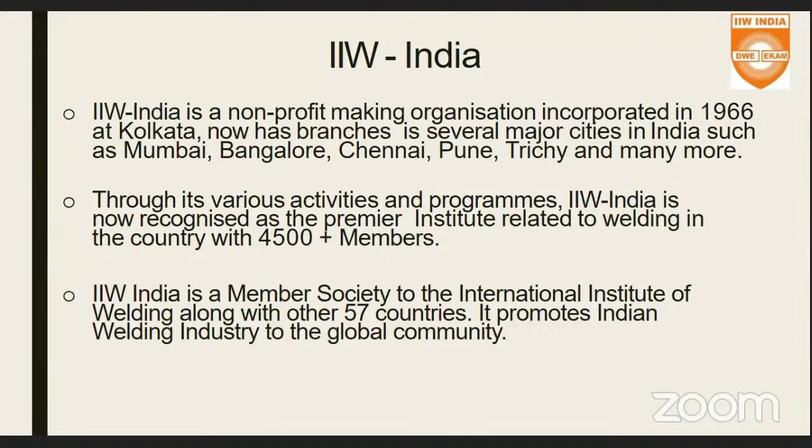Baroda, and many more. So IIW India carries out various activities and programs, and it is now recognized as one of the premier institutes in the nation, having more than 4,500 plus membership strength all across the nation. IIW India is a member society to the International Institute of Welding, along with 57 other countries. So IIW India is our face to the global welding community associated with the International Institute of Welding.

What are our major objectives? These are some of our major objectives. For example, we assist in human resource development in welding in India through activities and programs, and technology diffusion to the industry and to individuals. We also help people with research and development in welding. We focus on promoting health and safety aspects in welding and try to give knowledge to the industry about it. We also work on establishing international standards of quality for the Indian fabrication industry.

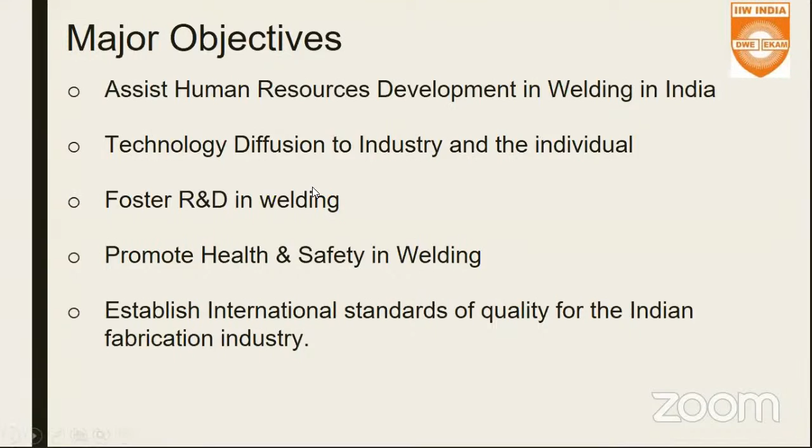Next slide. So, what are the various activities adding value to an individual and to an organization? We conduct technical meetings, workshops, and nowadays webinars. This is our World Tech Talk series, which we do every Saturday, and you all are benefiting from it. We organize various seminars, conferences, and exhibitions on welding and allied technologies at various branch levels and also at the national level, and we even participate in international events organized by the International Institute of Welding.

Besides that, we also have the Indian Welding Journal, published quarterly in collaboration with AWS, the American Welding Society, and we have a monthly newsletter also available on our website. This is the website, you can go look for yourself. So if you are a member, you can avail much more benefits.

Next slide. Some more activities related to career development of an individual in the welding industry. We help people get qualified for certifications or qualifications like International Welding Engineer, International Welding Technologist, and many more. With regards to skill development, we are connected with, for example, the Automotive Sector Skill Council and many other skill council bodies to develop welder skills, particularly in the nation. So we are heavily involved in such kinds of activities.

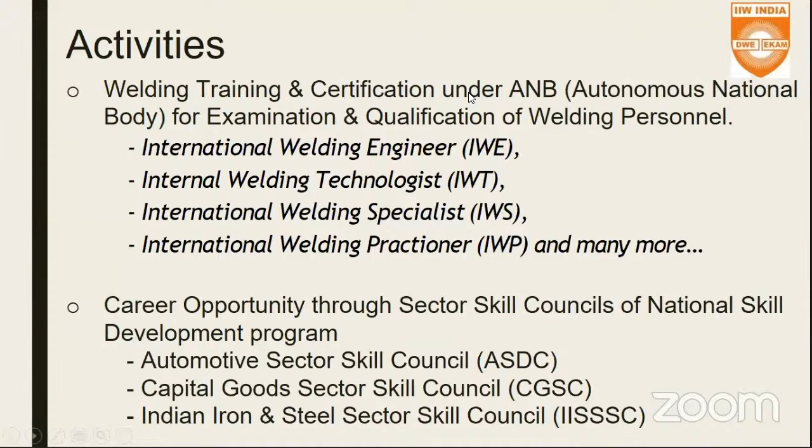Next slide. As we spoke about technology diffusion, how are we doing it? We do it by publishing journals, conducting technical programs, and skill development programs. Besides that, AM-IIW examinations are also conducted, and national level welder, best welder, and best welding engineer competitions are organized by IIW India. When I say welder competition, it covers both male and female. We carry out training courses meant for training the trainers, and we also help industry in acquiring ISO 3834 kind of certification schemes.

Next slide. Coming to the benefits of becoming an IIW member, you can take advantage of various courses and examinations that will help you in your personal career in the welding industry. You have a platform to disseminate your knowledge in welding, to add value to yourself and to others, useful networking with fellow national and international experts, free access to the quarterly published Indian Welding Journal. You can have access to those journals, and you can avail concessional charges whenever attending any welding seminar or technical event organized by IIW India.

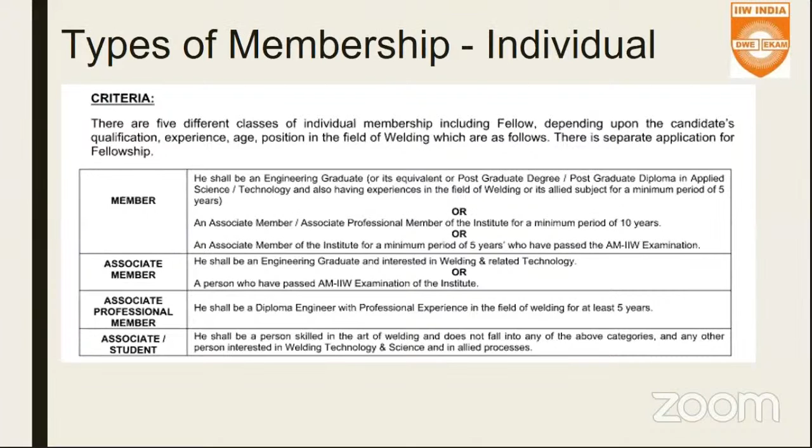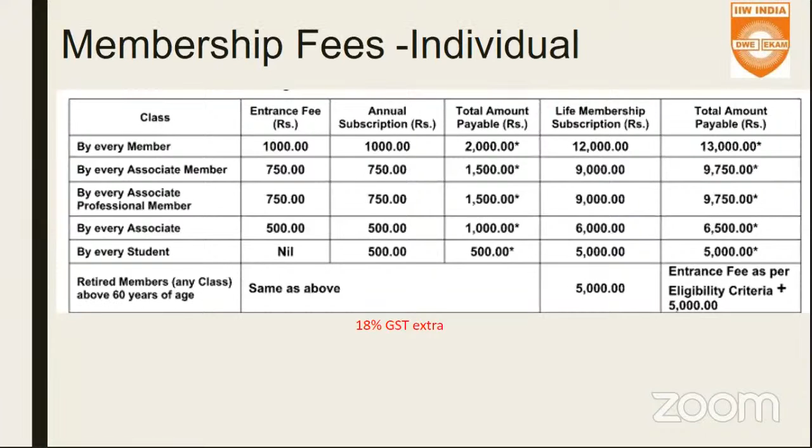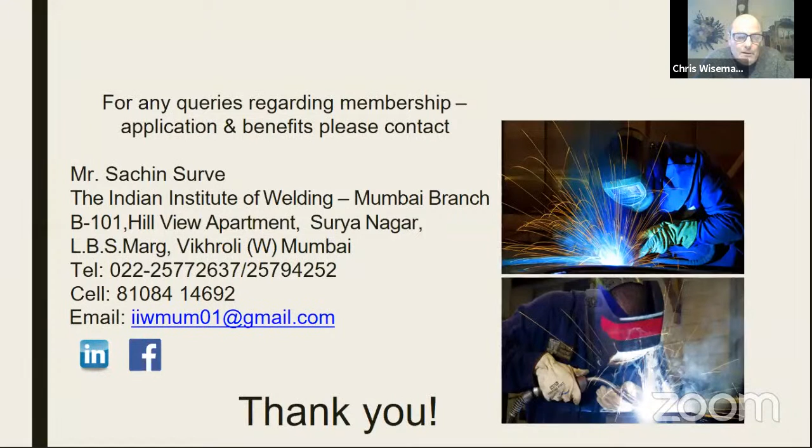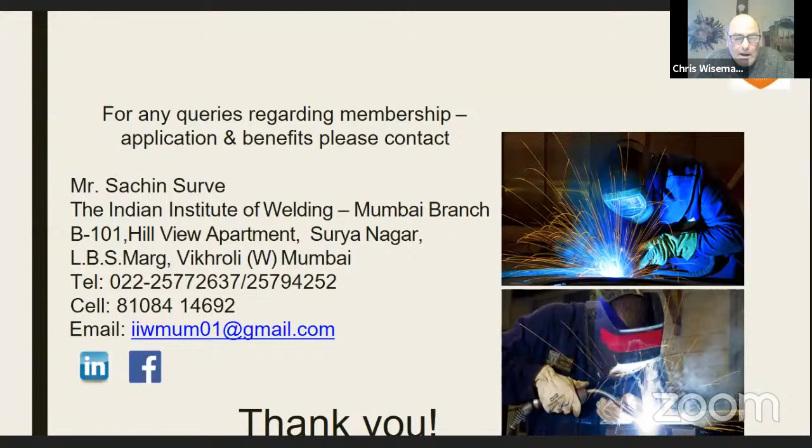One of the things I remember very vividly about 15, 20 years ago, we were trying to sell aluminium to the automotive industry. And Jaguar, who are not far from where I live, actually asked my company to show them how to put aluminium together. We entered into a whole raft of projects ranging from surface treatments to spot welding, through adhesives, that kind of thing. That's when I became aware, because I'm not a welder, how difficult this material can be. So I'm hoping today Jan will throw a bit of light on some of the practical aspects and the characteristics of aluminium that make it a very special, difficult, but well worth material.

Particularly going forward as we're looking to lightweight in many different industries. So Jan and I have quite a lot in common, not least, I think he's almost as old as I am. We both live in the West Midlands, which means we both can just about understand Birmingham accents. But there the similarity ends, and I think you can see that straight away, it's around our heads. I do remember when I last saw Jan in person, he actually recognized me in a crowded room and called out my name from behind, and he purely recognized me from my lack of hair. So it's quite an interesting feature.

Jan is actually the technical manager for something called the Aluminium Federation. This is an organization which TWI is very proud to collaborate with from time to time, particularly technically, but also commercially and sector-wise. It's known as ALFED for short, and it's actually headquartered not far from where I live in a place called Halesowen, which is in the Midlands of the UK. ALFED basically represents and creates opportunities for companies and individuals who may work with, process, or trade in aluminium. ALFED is very UK-centric, but it also has a global reach and remit.

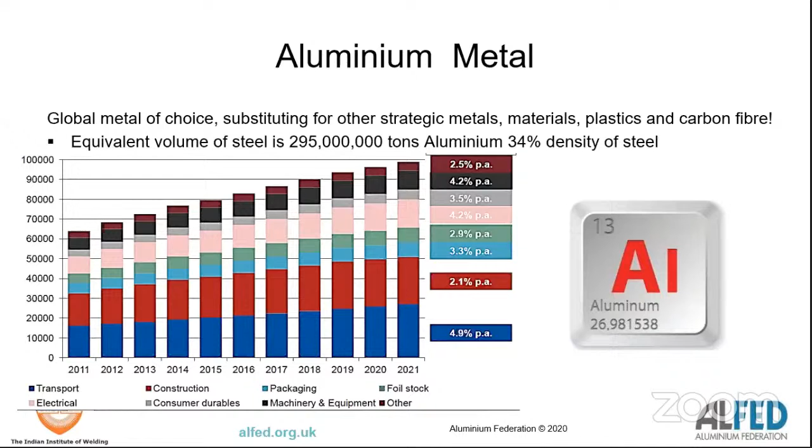Aluminium is a light metal, so we should never talk in weight of aluminium, we should talk in volume. So in 2021, we're going to have a third of a billion tons of equivalent aluminium to steel. Steel production is about 1 billion tons. If you talk in terms of the equivalent volume of aluminium, it'll grow to about a third of a billion tons. The predictions are that by 2030, we will be approaching 500 million equivalent tons.

So let's pick out the problems of welding aluminium. The very first problem you're going to encounter - yes, we can match the strength, but it's got a very low Young's modulus. It's very elastic, very low melting point. When you heat it up, it rapidly loses tensile and yield strength, which is actually a big benefit. The thing that frightens everyone is its ability to form a tenacious oxide, which is actually a benefit in many things. It's got high electrical conductivity, high thermal conductivity, low resistivity, and high thermal expansion. From the welding point of view, fearful properties, but they are absolutely easily understood and easily controlled.

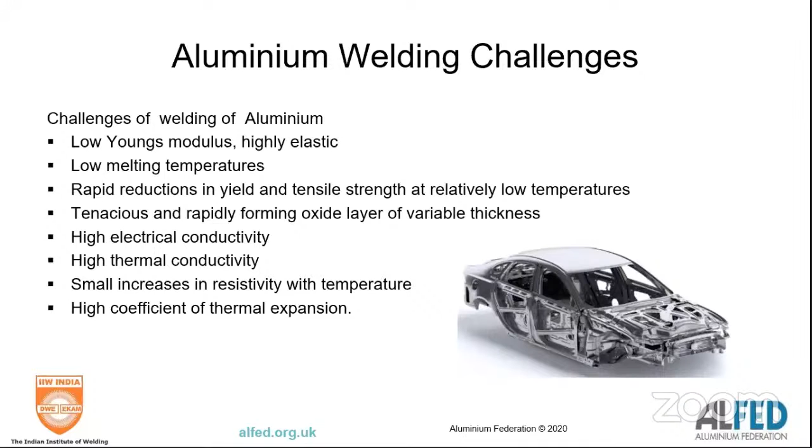Because aluminium is a young metal, it's been developed by metallurgists, and incrementally, the series have been developed. Very briefly, the 1000 series are pure aluminium. The 2000 series are based on copper, an age-hardenable aluminium. 3000 is an improved manganese version for high resistance. 4000 is actually specifically designed originally as a filler for welding. 5000 dominates automotive, non-heat treatable. Then we come into the high tensile 6000 and 7000 series, which dominate aerospace.

In terms of weldability, the 1000 and 4000 series have incredible weldability, as good as any steel once you understand them. The 3000 and 5000 series have got very good weldability. The 6000 has good weldability once you understand how to weld it. And then you run into the problems of the 2000 and 7000 series of aluminiums - these have got very limited or very poor weldability. We'll pick those out. And then there's a mishmash series of 8000, which is looking at medical, nuclear, bearings, everything else, very variable welding in that area. So let me pick out the first property.

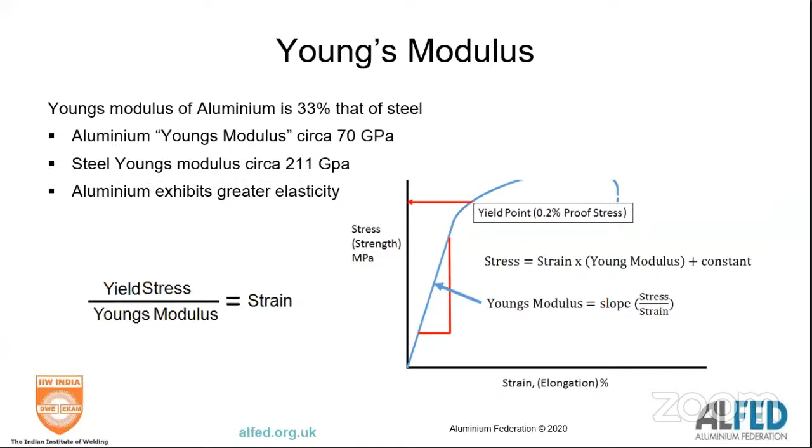Aluminium's actually got a low Young's modulus, about 1/3 that of steel. So although we can match the yield strength and tensile strength of a lot of alloys, it is far more elastic. And that elasticity means that when you're doing things like forge welds, you've got to do a lot more effort. In a typical forge weld where you want to upset, you would need to put in about 3 times more upset deformation to achieve a forge weld in aluminium because of its low Young's modulus, because of its high elasticity. It's very, very springy.

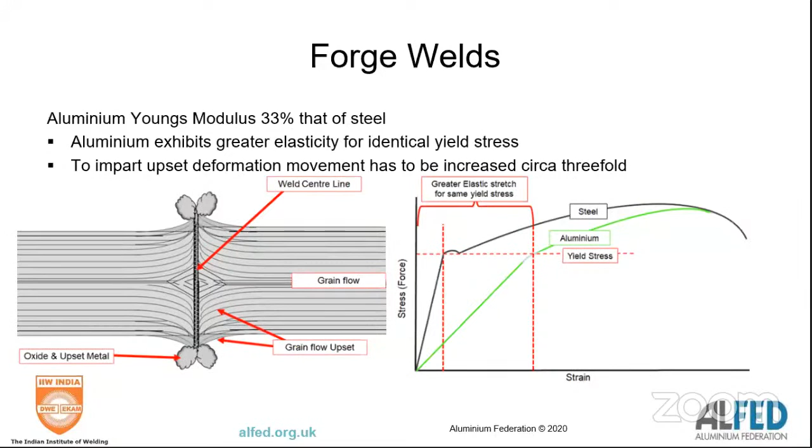That springiness is great when you're designing suspension components or crash cans or things like that, but it's a problem. So when forge welding it, when you're upsetting it, in essence you've got to do 3 times more plastic deformation to achieve over steel. If you don't, particularly in a forge weld, you end up with a wide weld center line, which is effectively a fusion rather than a forge weld with poor strength. So that's the very first, easily overcome problem of aluminium - low Young's modulus.

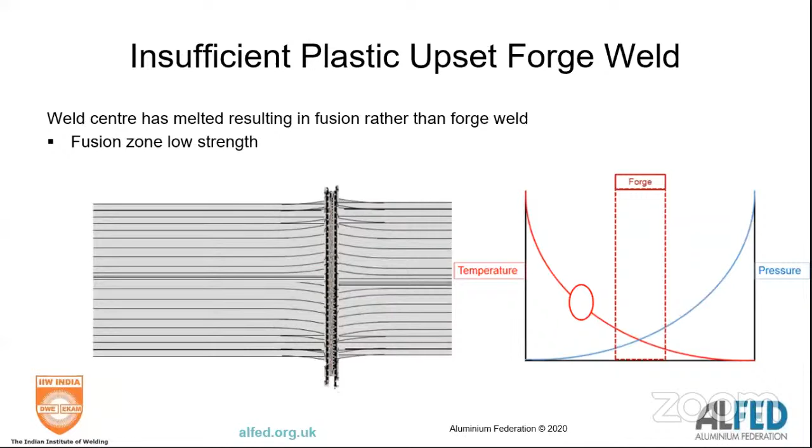Pick out an important property - aluminium's got low melting points. Pure aluminium melts at 660 degrees C. If you look at the higher aluminium alloys, they have low melting points down to about eutectic temperatures, down to 450, 470 degrees C. So it's a very low melting point metal. At 450, 500, you're below red heat. So very low melting temperatures. That has implications in that we don't form scales, we don't need complex tooling, we've not got thermal losses, we've not got radiation losses. So it's a plus and a minus.

One thing you need to understand when talking about aluminium is exactly what we mean. When we warm aluminium from room temperature, we have to put a lot of heat in - effectively, that's specific heat, the energy required to raise the temperature of a metal. In essence, specific heat is the heat to raise unit mass by 1 degree Kelvin. What I'd like you to understand is that specific heat has units of joules per kilogram kelvin, and a joule is a watt second. So whenever we talk energy, we are actually talking about a time element. People think of energy purely as temperature, but you must understand that energy has a time element, and that is the secret to welding aluminium.

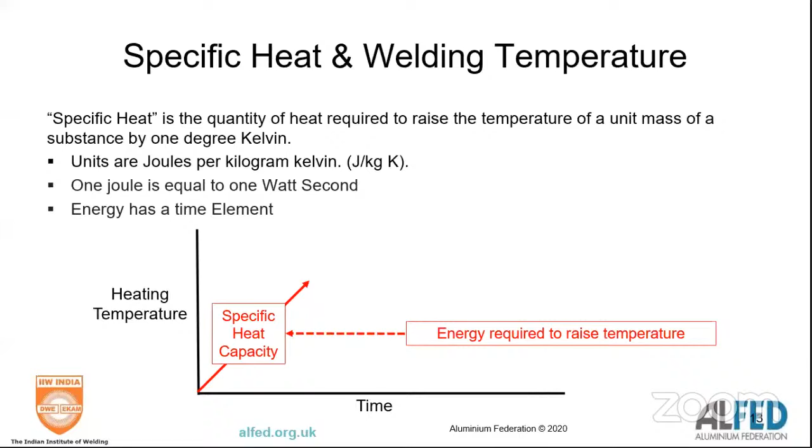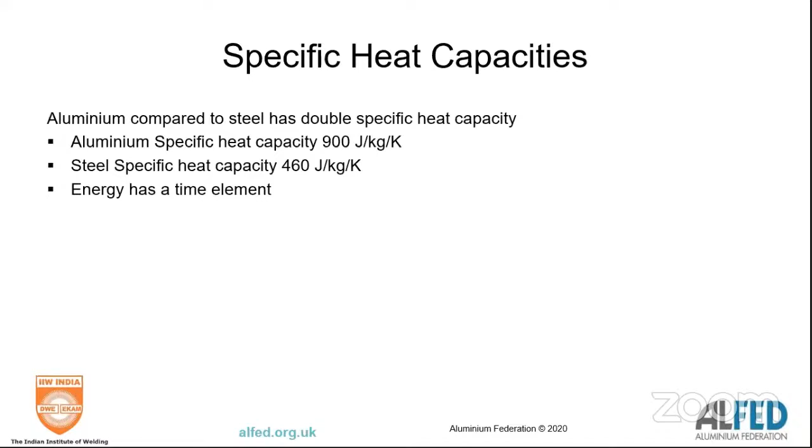So aluminium has double the specific heat capacity of steel, and that has a time element. In essence, what that means is when you put energy into aluminium to heat it up, nothing happens for a period of time, because what you're doing is raising its specific heat, and then it sails away. So with aluminium, what we have is a time element, because energy has a time element in it.

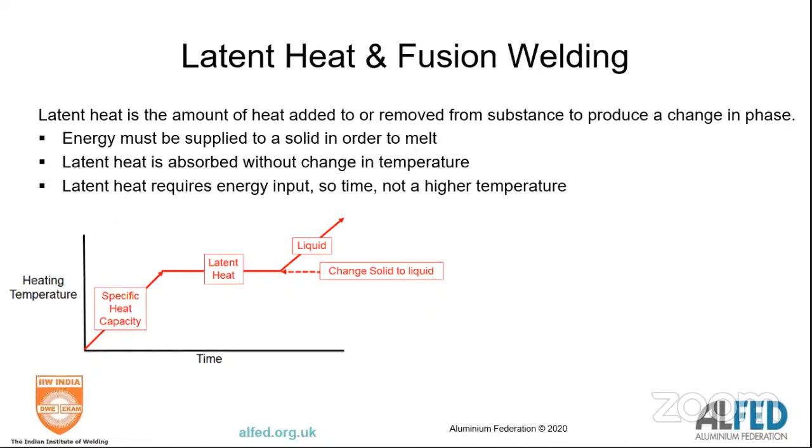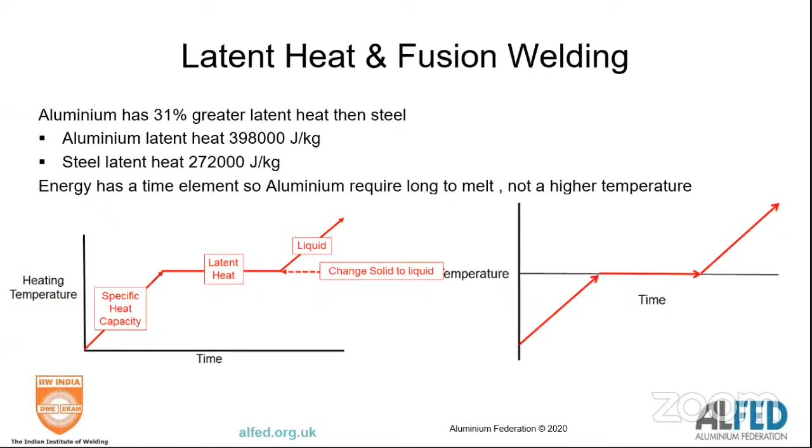When you talk fusion, so we've raised the temperature of the solid - when you come to fusion, you've got latent heat. Latent heat changes solid to liquid, and aluminium again has a third higher latent heat. So again, what you need to do is put more energy in, but in terms of time - you pause to put the energy in rather than turning up the temperature. So many people, when they're welding aluminium, think nothing's happening, and the normal thing is to turn the welding temperatures up, and then you just end up with a melt, a disaster.

The other thing that happens is that aluminium has very, very high thermal conductivity - about 200% the thermal conductivity of steel. That means you've got a high rate of heat extraction from weld zones. Bearing in mind that when you're heating aluminium up, you've got a time element, so you're heating time up, but conduction has a time element too, so you're actually taking a lot of heat out as you're putting heat in. So always with aluminium, what you see is a time delay.

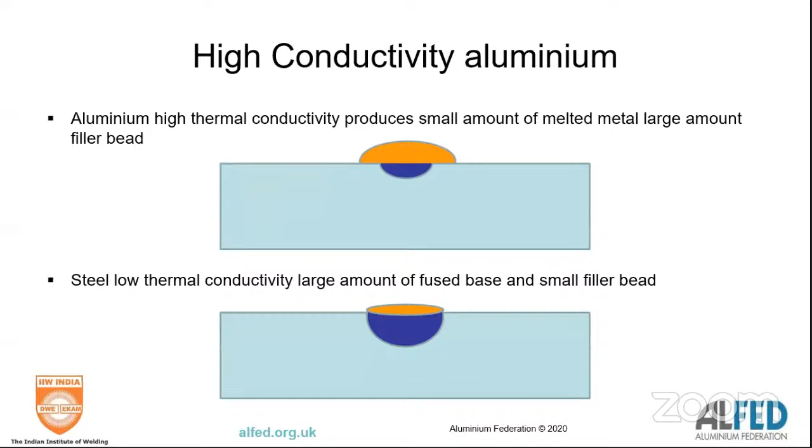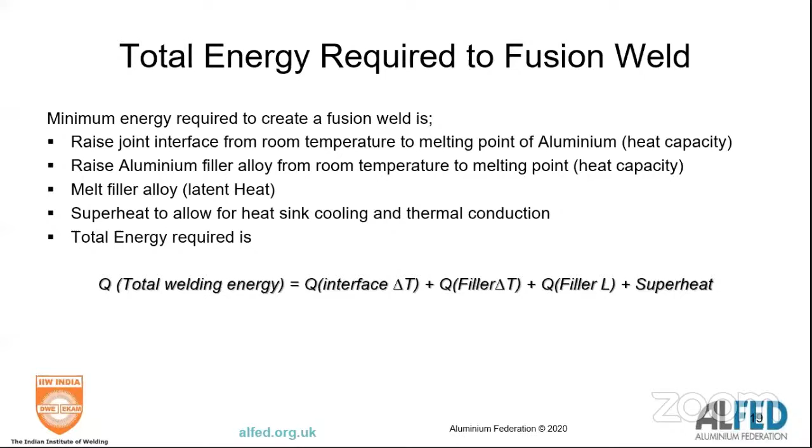The high thermal conductivity and the high specific heat in essence means that when you're doing welding, you produce a very large filler bead and a small amount of parent metal, in opposition to steel, where you produce a small weld bead and a big fused base. So aluminium behaves oppositely to steel. In essence, when we talk about energy, the problems we have with aluminium, which are not really apparent with steel - yes, we've got specific heat, yes, we've got latent heat, but you've got latent heat of the filler and of the parent metal, plus significant conduction away. So you need to consider superheat when talking about the total energy for welding aluminium - that superheat element to overcome conduction.

Pause a minute and let's look at electricity.

Aluminium's actually quite a good electrical conductor. Its resistivity is about a third that of steel, roughly 1.5 times that of copper. So it's a poorer conductor than copper, but a really good conductor compared to steel. In terms of welding, we consider it to be a very good electrical conductor.

We need to drop another thing in. We should talk about alumina in a moment, but aluminium forms an oxide that is an electrical insulator with very, very high resistivity.

So picking up on what we've spoken about so far, in essence, aluminium has a low melting point, typically about 40% that of steel. Welding temperatures are much, much lower than steel, never more than about 60% of that of steel. If you allow for the specific heat and latent heat, typically you've got to put 300% more energy in than you would for steel. Remembering that energy has a time element, because of that, your process times are about 30% greater than that of steel. So more energy, greater times, but very weldable.

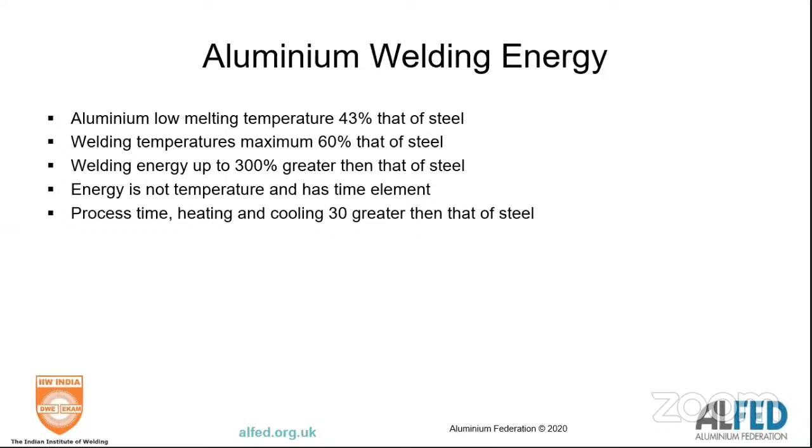One thing you need to do when welding aluminium is go and buy yourself a cheap imaging camera. We are invariably welding below red heat, so you cannot see what's going on. A very cheap imaging camera will show you what's going on, and it will also indicate temperatures. It's very, very useful to get yourself one of those. It's part of the secret to good welding.

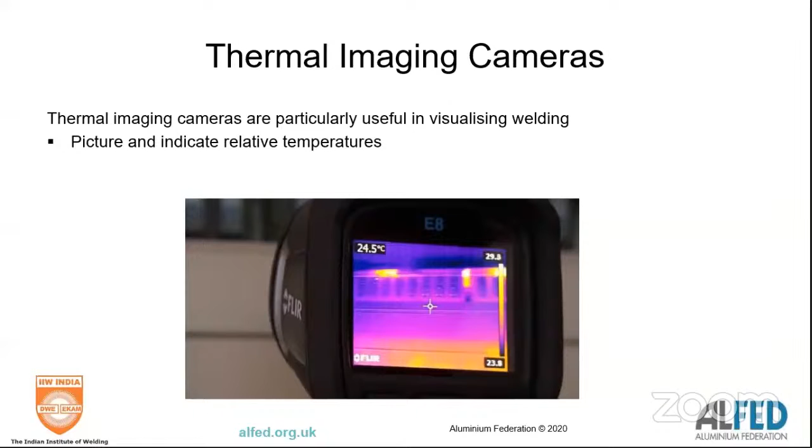Let's look at another property. When you melt aluminium, it has high fluidity, and particularly the 4000 series, which are based on silicon, have incredible fluidity. If you talk about the high silicon aluminiums, you can have fluidity which matches that of water, an incredible property for castings. You need to understand that when you're welding, because you're going to end up with fluidity like that of water.

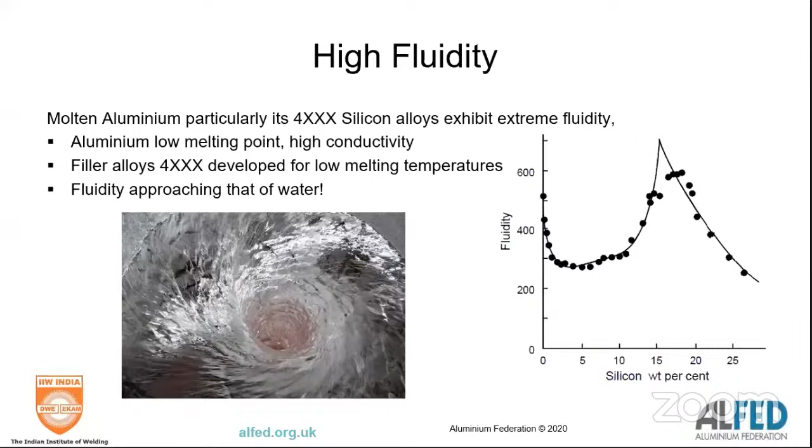The 4000 series of aluminium are based on silicon, so silicon is the principal alloying element. The reason they were developed is that parent metal alloys have high thermal conductivity and low melting point, so if you try and weld them, you just end up with a pool of liquid. By developing the 4000 series, with low melting points down to the low 500s and some down to the high 400s, you can now melt your filler metal with good fluidity without melting your parent metal. So it's an important property.

Let's talk about aluminium oxide. Aluminium oxide is incredible because it imparts the corrosion resistance that sets aluminium aside from so many other metals. But it's alumina, aluminium oxide, so it's a ceramic, meaning it's an electrical insulator. At 15 microns, the breakdown voltage is about 500 to 600 volts. It has a very high melting point, about 2000 degrees C, and very high hardness, typically about 900 Vickers. It's also very brittle. One thing you need to realize is that alumina is much heavier than aluminium.

So if you've got alumina forming in a weld pool, it will sink to the bottom as an inclusion.

Now, aluminium really develops an oxide instantaneously. If you scratch aluminium, by the time you've walked away, that scratch will start to self-heal. Typically, if you've got a chemically active surface of aluminium, within about 20 days it will have developed 10 to 15 microns of aluminium oxide. And that aluminium oxide carries on growing. It's one of the plateau curves, but aluminium will always form an oxide. It is self-healing and it will grow with time.

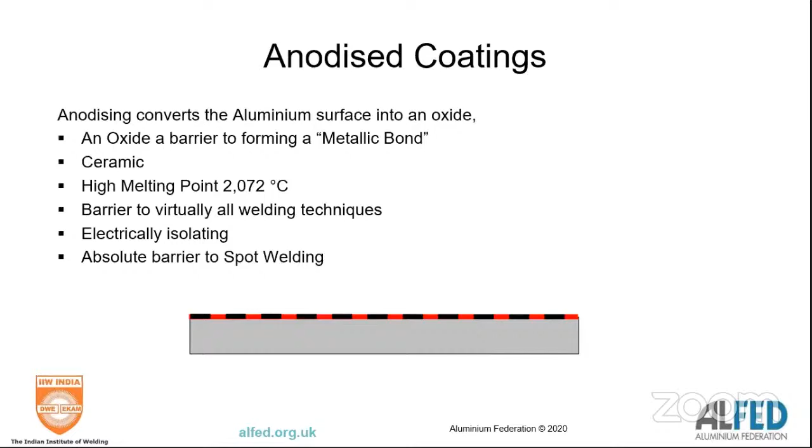You're going to come across anodized coatings. In essence, with anodized coatings we electrically and deliberately oxidize the surface of aluminium to produce an alumina coating on it. If you've got an anodized coating, you will never, ever be able to weld it. It's an absolute total barrier. So, alumina is a thermal and electrical insulator, a total barrier.

When you weld, you go back to very basic theory. What you do is produce a metal-to-metal atomic bond, but you've got a ceramic oxide in the way, so you need to remove it. You need to either push it out, exude it, or melt it out.

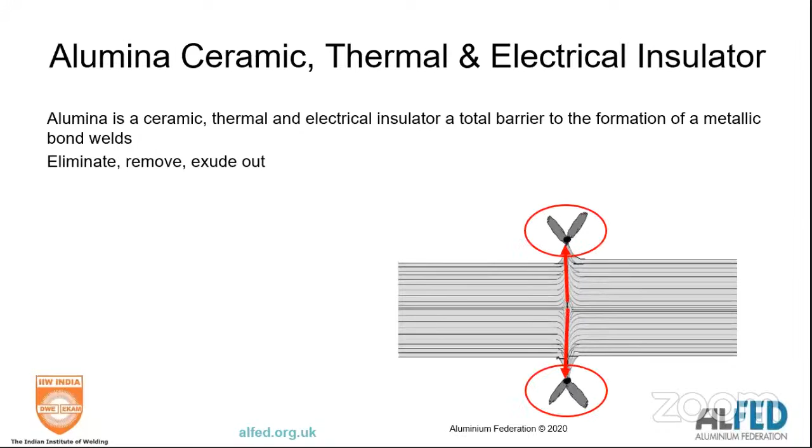If you're going to do very simple welding, very quick, you can physically remove the aluminium oxide, abrade it away, grind it, machine it. But remember, you've got a short time interval. If you grind aluminium, depending on humidity and temperature, you've got 2 to 3 hours before that oxide starts to form. You can atomically remove it.

You can use electricity, electron flow, by adding a couple of electrons to reduce the oxide and lift it off. You can chemically remove it and passivate the surface. You can upset the alumina out as part of the welding process, a forge weld, and you can melt and shield it with laser welding, using very high temperature methods. You can melt that alumina and remove it. Remember that it's heavier than aluminium, so it'll sink if you're not careful. And you can disperse alumina through processes like ultrasonics.

So I'm going to pick up on the last one. There's a lot of work going on in the automotive industry in the UK and particularly in the USA, and Ford are now starting to ultrasonically weld aluminium. In essence, ultrasonic welding is a micro explosive weld. What happens is the welding tip is vibrating at ultrasonic frequencies.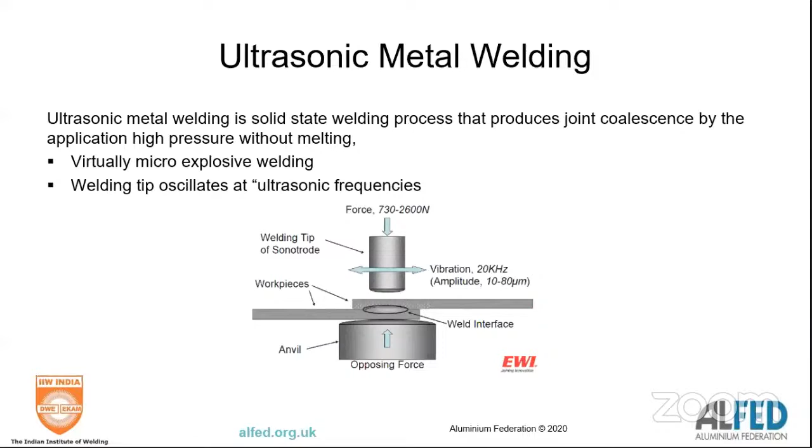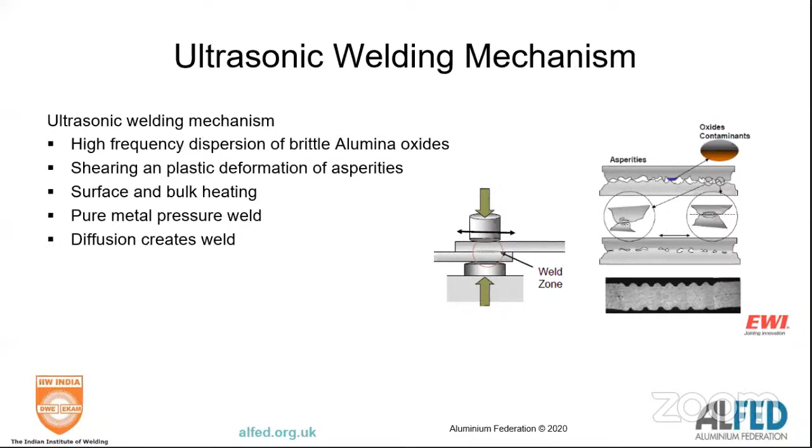Because it's welding at ultrasonic frequencies and alumina is brittle, ultrasonic frequencies actually shatter and disperse the alumina. Then pure aluminium to aluminium is a shearing process, so you form surface and bulk heating, and it becomes a pressure weld. So ultrasonic welding deals with alumina - in essence, it's a micro explosive weld. Lots of work is going on, and Ford has now started to commercialize the process. If you're talking microelectronics and small components, ultrasonics is catching on in the UK as an alternative to soldering.

Just to pick out a property of aluminium: it is non-sparking. When a metal sparks, what happens in essence is the pure metal is burning in oxygen to produce an oxide. Because aluminium will instantly oxidize, you very rarely see sparking of aluminium, because it forms an oxide instantaneously.

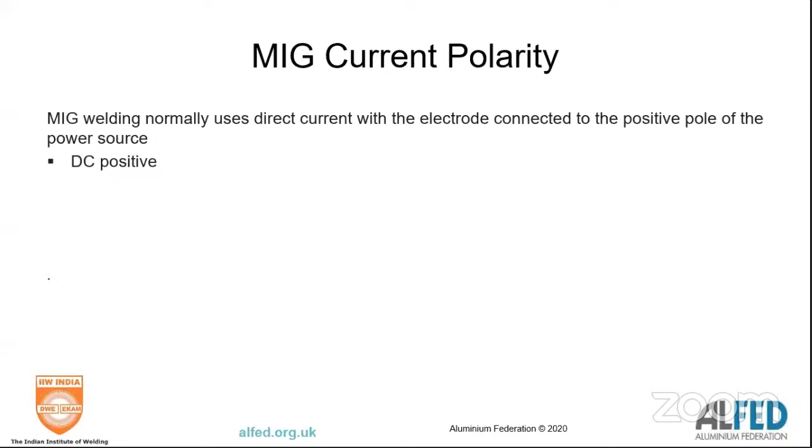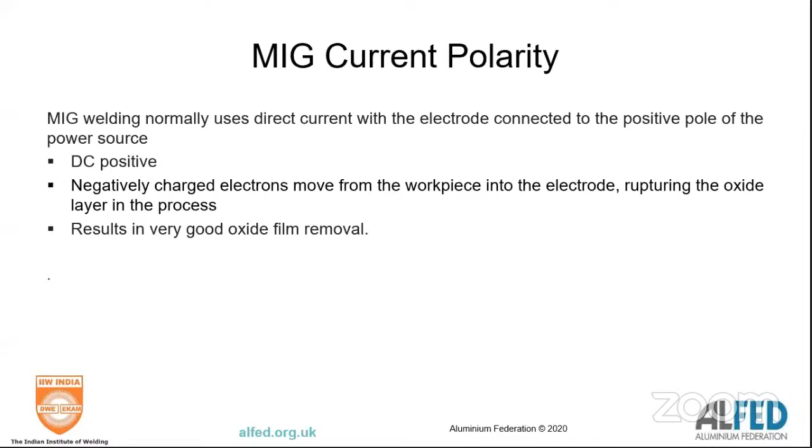So let's talk about a big process of welding aluminium - fusion welds. If we talk MIG, the beauty of aluminium is you would be DC positive welding. So you connect the positive pole to the power supply. That means the negative electrons are coming out of the workpiece towards the electrode. In essence, because they're coming up behind the oxide layer, they are actually breaking up the oxide and lifting it up.

In essence, there's a chemical reaction coming in. Electricity is the flow of electrons - a couple of electrons are bonding with oxygen to produce an oxygen molecule, lifting the oxygen off. So with MIG, when you're using DC positive because you want to melt your filler rod, it self-cleans. If you're doing automated MIG in the UK, a lot of people are still removing the oxide to speed up the process.

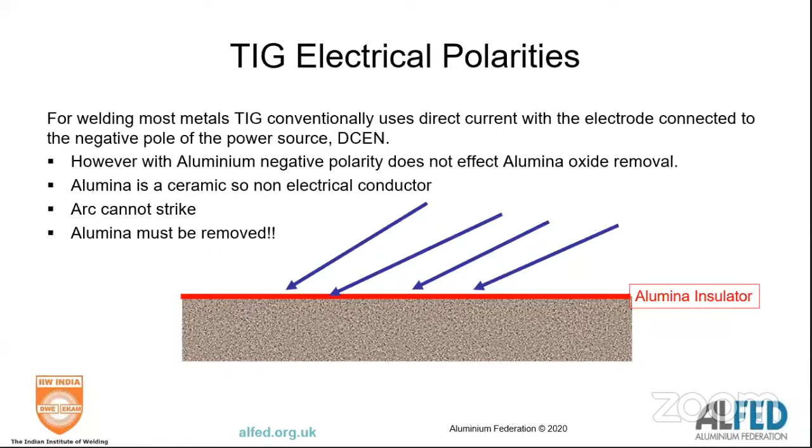With TIG, now you have a problem. The problem with TIG is that ideally you want to connect to the negative pole to keep the electrode cold, but that means what you've got is an electrical insulator. So if you're going to negative weld TIG - and people do for speed - you have to either chemically remove it or grind it away, or alternatively plus pole weld it. British Oxygen in the UK have developed a technique called plus pole welding, which they use to plus pole weld aluminium at very high speeds.

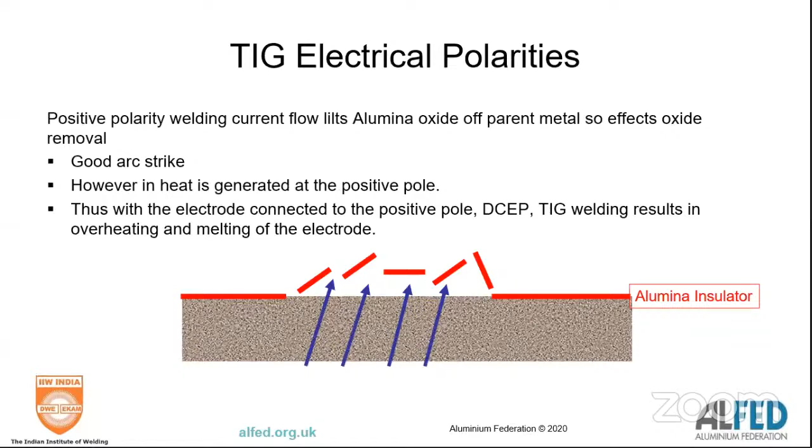Most TIG, for the reason of the problem of heating the electrode and breaking off the oxide, is AC welded or square wave welded in the UK. So in essence, in the positive cycle you're breaking off the oxide, and in the negative cycle you're welding and keeping the electrode cool.

We've spoken about aluminium oxide. If you're going to be welding straight after removal, or within a reasonable period, you can mechanically brush the oxide, the alumina, off with stainless steel brushes. Just remember to keep your brushes segregated for aluminium. You can Scotch Brite abrade the alumina off. Never use emery or sandpapers because they are alumina, and certainly never use carborundum or carborundum grinding stones because they are alumina - in essence, you'd just be putting the coating back.

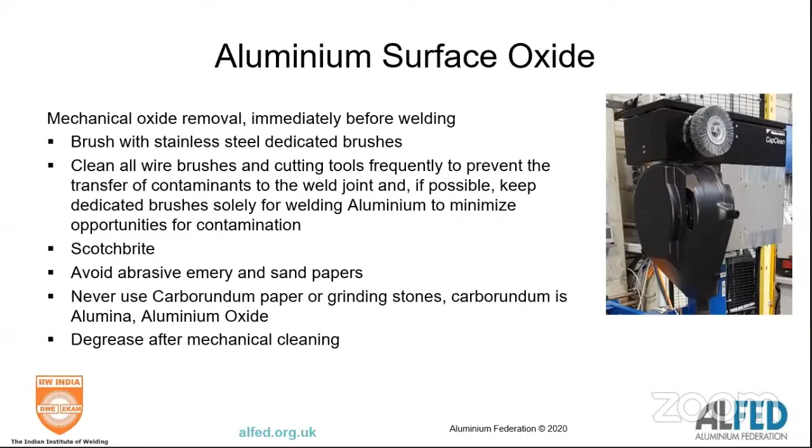Whenever you abrade, degrease afterwards. The preferred method in the UK is to chemically remove the alumina, and certainly the big automotive companies are either buying pre-treated sheet. So if you're talking body in white, they will buy pre-treated sheet which has been chemically etched away and then passivated and/or lubricated. So you might be buying pre-lubricated sheet.

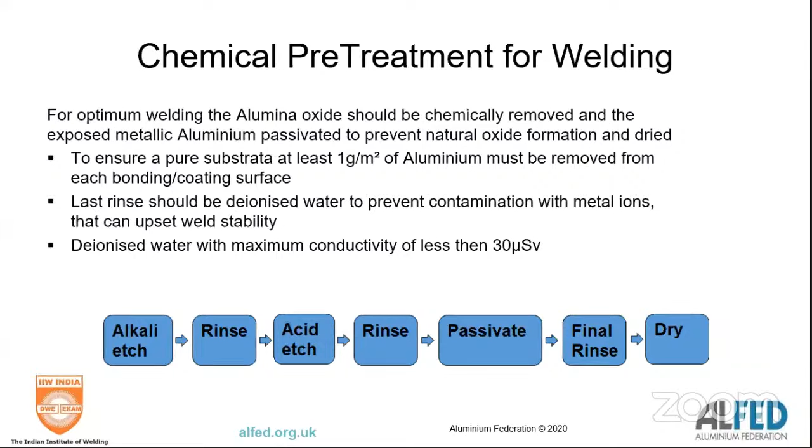We're moving on at a pace, so let's do a little bit of metallurgy.

When we're talking parent metal and filler metals, invariably the two will have different melting temperatures. As you weld, you'll form a spectrum from pure filler somewhere in the middle, coming out to an alloy range at the outside, and the temperature will change. But whenever you melt an alloy, the resultant solidification temperature will be much lower than both starting alloys, and it will be a constant temperature. So with A and B welding coming in, eventually we form a eutectic temperature somewhere in the area. That eutectic temperature will be significantly lower than either the filler or the parent alloy—in some cases by as much as 150 degrees C.

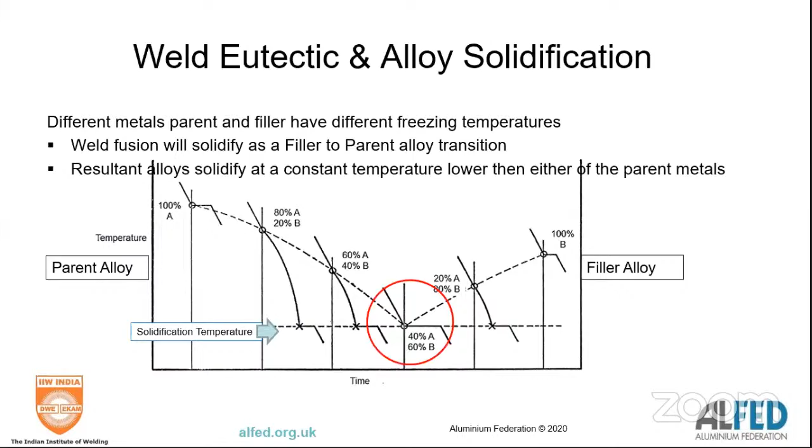In fusion welding, MIG welding, you'll have a complete spectrum of analyses with pure filler in the middle, and somewhere between the filler and the parent you'll form a eutectic, a series of alloys.

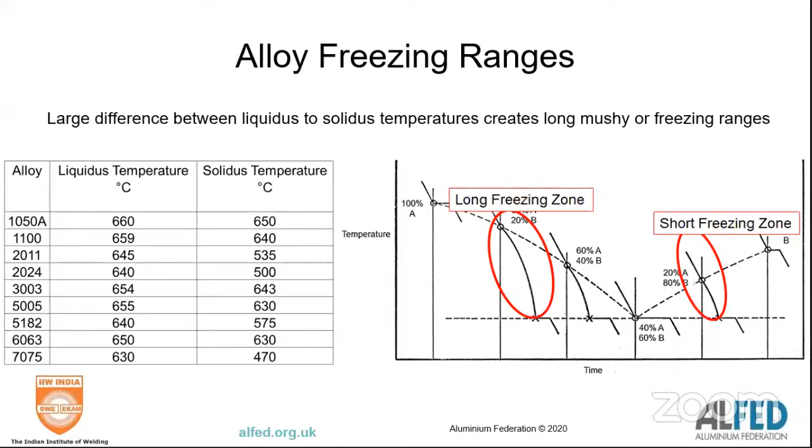One of the problems with aluminium is the big temperature gap from the liquidus temperature, where the alloy mix starts to solidify, to the eutectic temperature. If you drop down to 7075, and the 7000 series are regarded as very difficult to weld, the pure alloy would melt at 630 degrees, but the eutectic is 470 degrees. That means you've got a very large freezing zone, subjected to expansion and contraction forces which will pull it apart. So a very large freezing zone makes the alloy very difficult to weld.

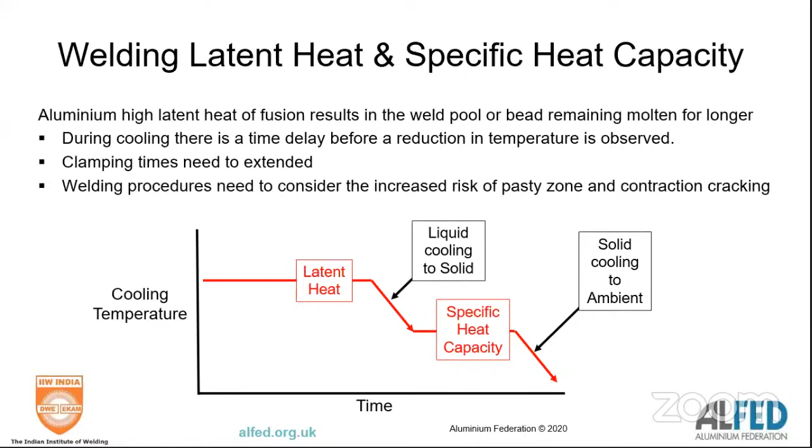High heat of fusion means that when solidifying from welding temperatures, it takes a lot longer to cool. So you now need to allow time for aluminium to cool. That means your clamping times are extended, and you need to worry about contraction cracking in the heat affected zone.

In fusion welds, there are effectively three types of shrinkage: liquid metal cooling, solidification cooling, and solid cooling.

Aluminium has very high thermal expansion, and consequently very high thermal contraction—very roughly double that of steel. We're fortunate that in aluminium it's almost a linear relationship with temperature. With steel it tends to sail away, but with aluminium, although we have high thermal expansion, it's almost a straight line relationship.

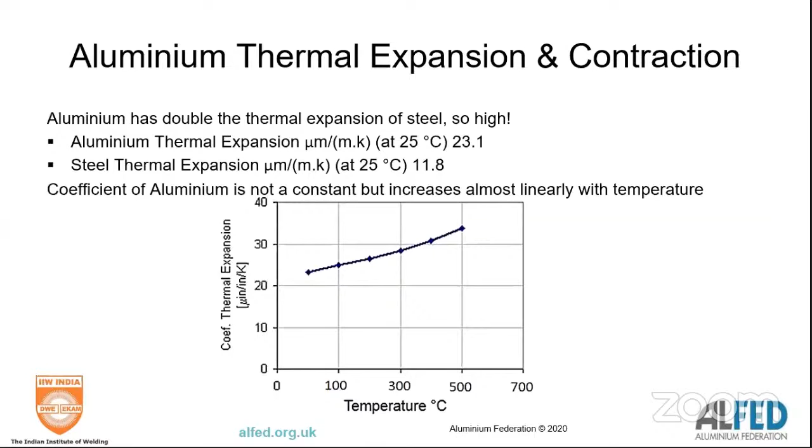Unusually with aluminium, some alloying elements, particularly the silicon elements which we put into 4000 series, actually reduce expansion. So with 4000 series aluminium, you could end up with a weld that, as it heats up, is actually contracting, whereas the parent metal is expanding—so you have both contraction and thermal expansion issues.

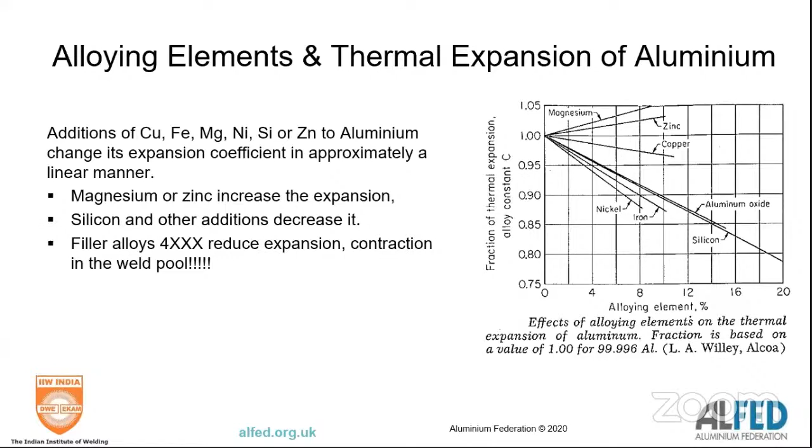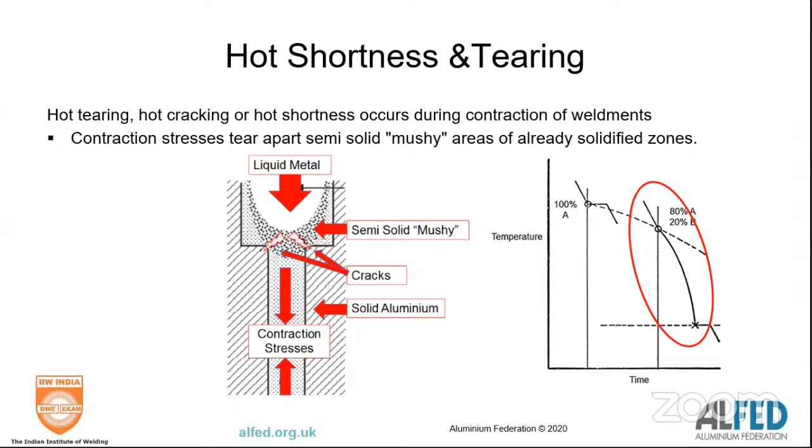Very roughly, if you work on the basis of a 6.5% shrinkage from liquid to solid, that gives you an idea of what's going on in an aluminium fusion weld. This manifests as hot tearing or hot cracking within weldments, particularly with alloys that have very large solidification zones.

A bit of simplification: aluminium alloys will form slags, particularly the magnesium ones, the 5000 series, and the 2000 series will form copper slags. By and large these sink to the bottom, and the way to prevent that is by planning for rapid melting and limiting the time at liquid temperatures. So you need a strategy for minimizing liquid metal exposure to the atmosphere.

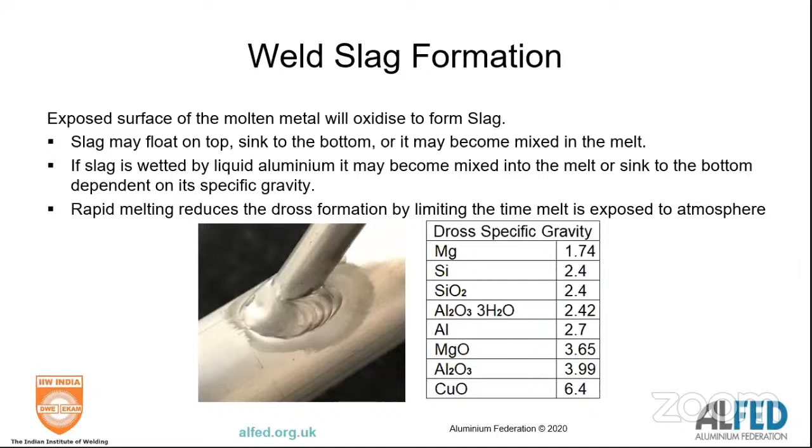Hydrogen is actually a problem for aluminium, but unlike steel, aluminium is not prone to hydrogen embrittlement—that's one of its properties.

If you're welding, you need shielding gases with incredibly low moisture levels, typically a dew point of less than minus 50 degrees C, and certainly a water content of less than 39 ppm. So you're looking at very dry shielding gases.

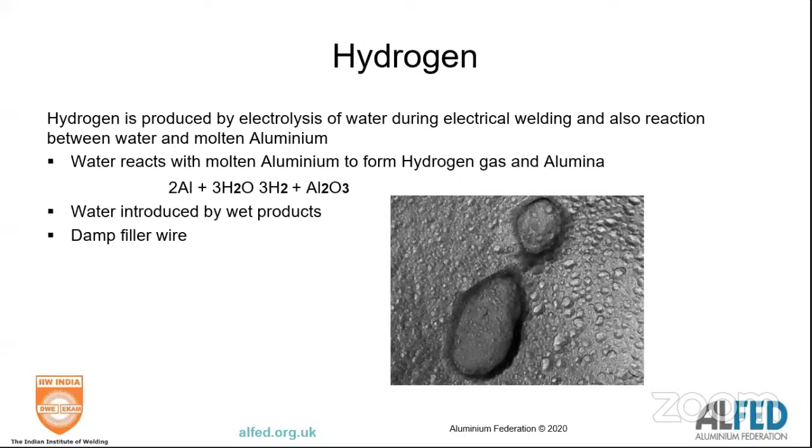Hydrogen is also produced during the welding process, particularly through electrical reactions, because when you've got damp atmospheres or high humidity condensing on your weld area, passing electric current through causes electrolysis and produces hydrogen. Problems can also arise with damp filler wire.

Hydrogen in aluminium is incredibly soluble. In liquid aluminium it has very high solubility. One of the problems with TIG welding is the high TIG welding temperatures. At the tip of the TIG electrode, you're at temperatures of 1800 degrees C, and the solubility of hydrogen in aluminium is incredible.

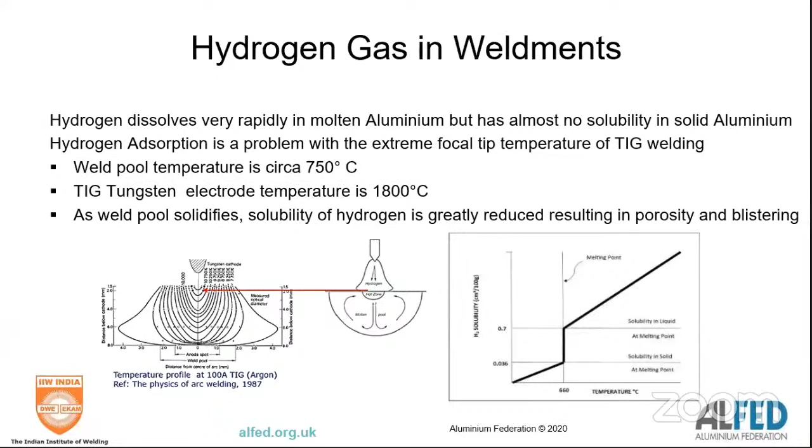But at room temperature, aluminium has virtually no solubility for hydrogen. So when TIG welding, the position of your weld is important. If you're welding upside down, hydrogen being a low weight gas will float up and increase porosity. So when designing your welds, be aware of hydrogen and be aware of porosity.

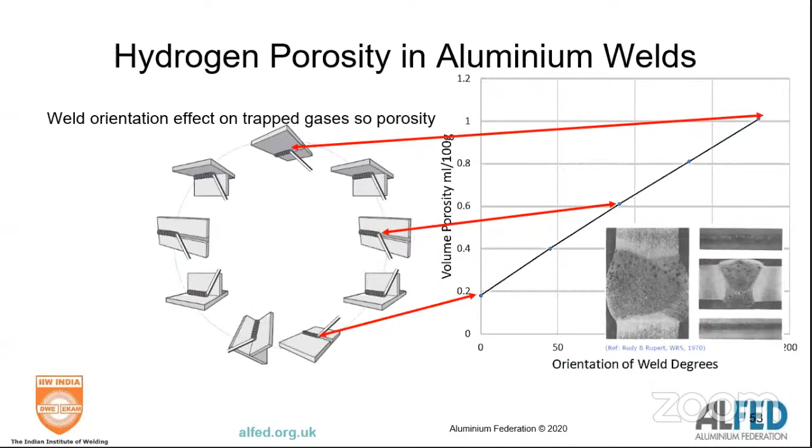One of the problems with hydrogen is if you've got damp atmospheres or high humidity, hydrogen will decompose through a chemical reaction on the surface of aluminium and form bubbles on the surface.

Moving on a bit more. One of the most important properties of aluminium is that at relatively low temperatures, its yield and tensile strengths dramatically reduce and it becomes super plastic. Most aluminium alloys at about 100 degrees C will have lost about 10% of their yield and tensile strength. By the time you're at 400 to 500 degrees C - bear in mind it has a low melting point - you might be down as low as 10% or 15% of the yield and tensile strength. It becomes super plastic, and the forces to deform aluminium become very low.

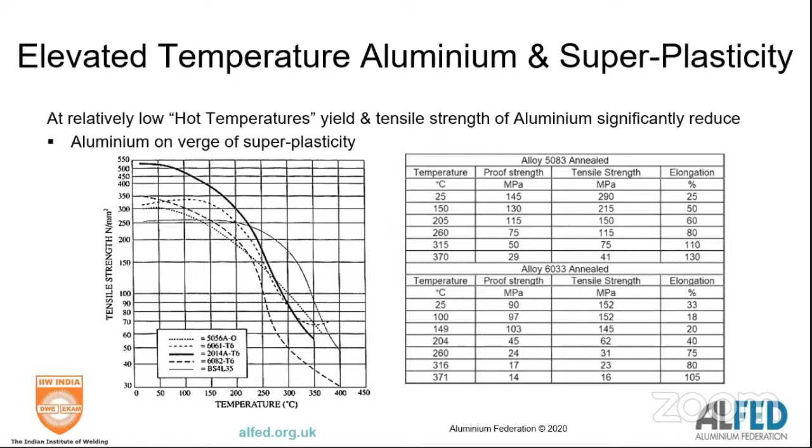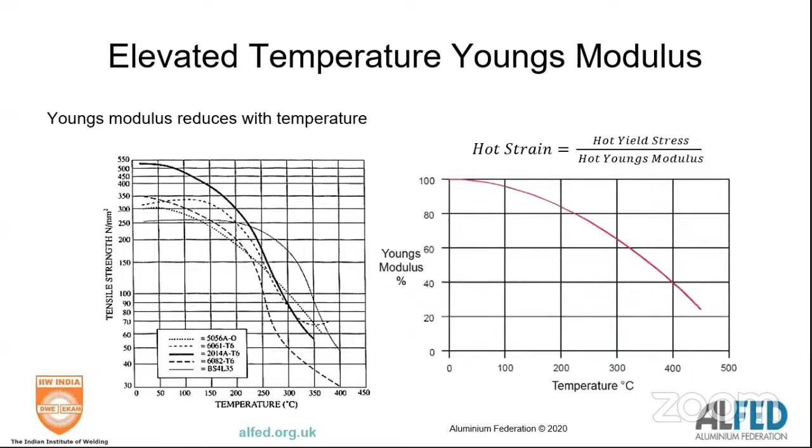But Young's modulus falls off equivalently, so you see a big drop off with Young's modulus alongside the loss of strength. So aluminium at high temperatures has a totally different strain rate to that of room temperature. You now need to understand you're dealing with a soft or weak metal with low Young's modulus behaving very differently to room temperature.

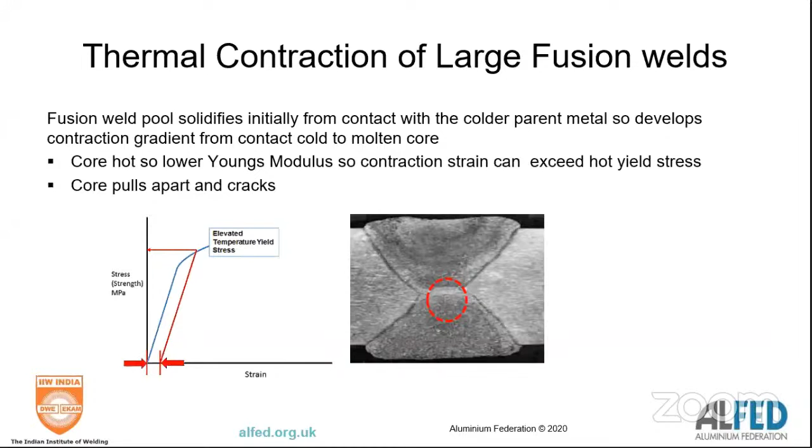That has implications when you've got large fusion welds, because the outside of the weld can cool to room temperature, but in the middle you're still at high temperatures with low Young's modulus and low strength - you can pull them apart. For the same reason, you can get thermal cracking in the heat affected zones, because parts of the zone can be at low temperatures where the parent metal is hot and contracting, and you can pull it apart.

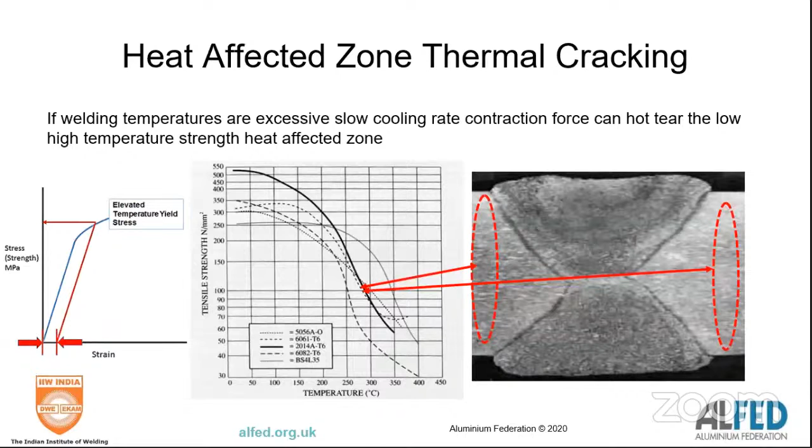One phenomenon with the 7000 alloys is we can get liquation cracking. If you've held it at temperature too long, sub-alloys form with low melting points, and you get liquation cracking.

And the last problem you must never forget about is thermal buckling of aluminium. When dealing with thin sheet, you've got high expansion rates but low mechanical strength. Potentially, if you're not careful, you'll get thermal buckling of aluminium.

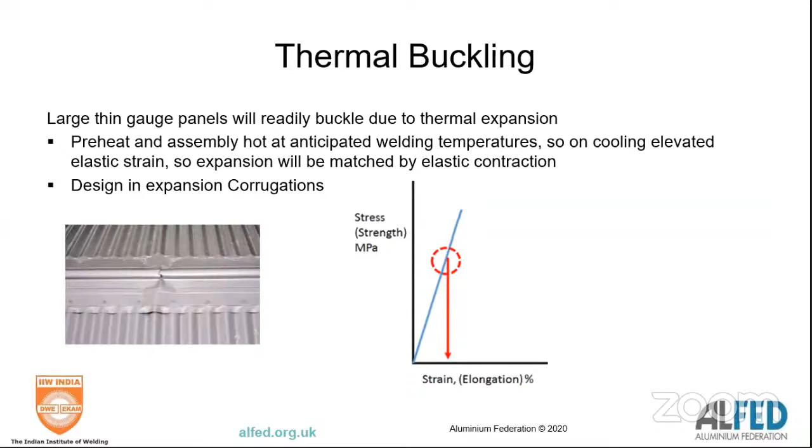We're moving on apace, but I know you are very keen to learn. So let's talk about electrical conductivity, and let me start with a little bit of theory. The heating of aluminium by a current is amp squared times resistance.

The first problem is aluminium has low resistivity, so amp squared times resistance gives you a low heating rate. You require a much higher current, about 4 times that of steel, to heat aluminium to the same temperature, but you've also got high thermal conductivity, so heat is extracted. And never forget aluminium has a low melting point.

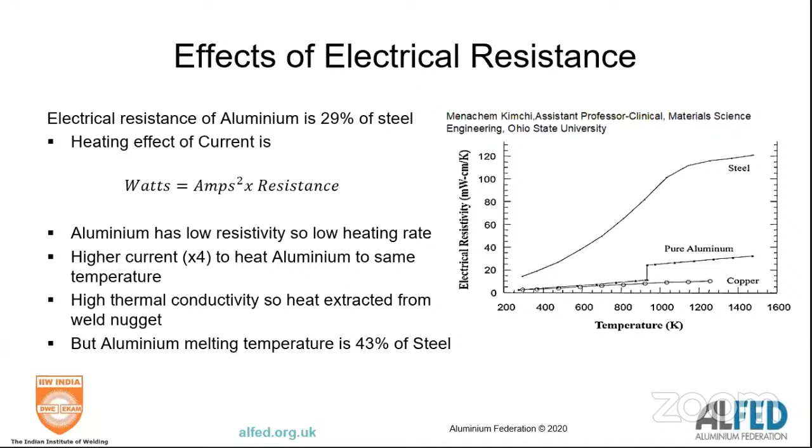Implications for spot welding: in essence, if you're going to spot weld aluminium, you need about 300% more welding current and about a 30% increase in process times. Typically that means you can't use steel spot welding equipment for aluminium because of the higher currents. You've also got a heat sink effect - you've got a tiny weld with big thermal conduction. So current is very important, and you've got high thermal expansion surrounding your weld bead.

A big problem we have with heating aluminium is that the resistivity of steel significantly increases with temperature, so the heating rate - amp squared times resistivity - increases for steel, but aluminium has only a small increase in resistivity. So you don't see the resistivity increase with aluminium that you see with steel. The heating effect is much lower when electrically heating aluminium, which means you have problems growing the nugget.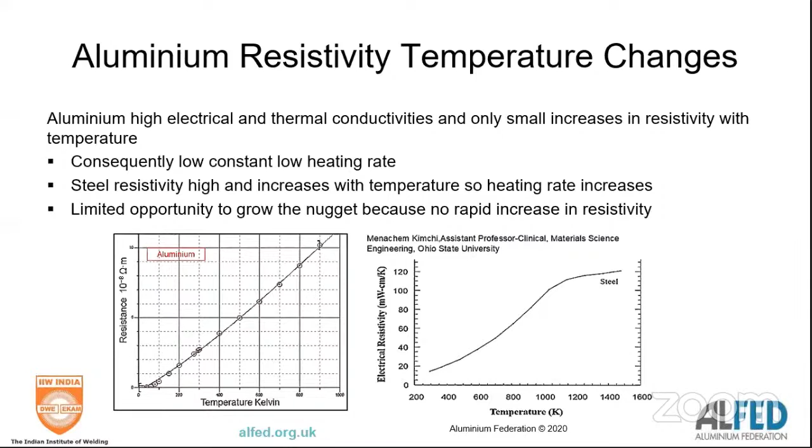Back to our favorite, alumina. A lot of people are spot welding aluminium without removing the alumina. They're relying on the mechanical force of the spot weld to break up the alumina and form the heating zone. You get a benefit from that because of the high resistivity of alumina, amp squared times resistivity. The problem is, as soon as you break through that film, your resistivity crashes down and you lose the heating effect.

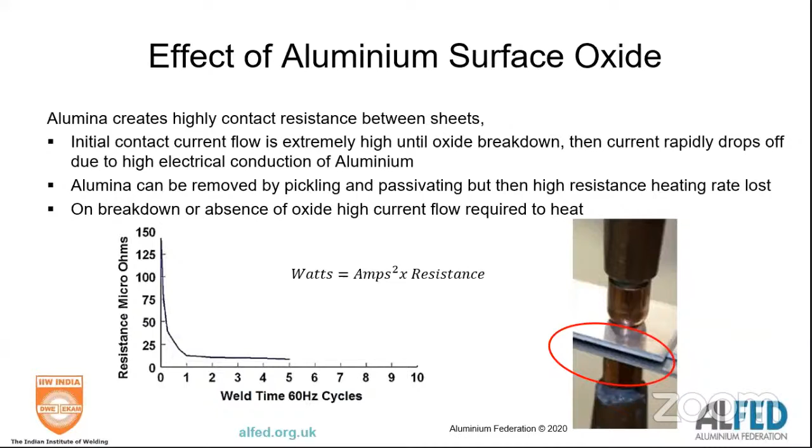A spot weld and mechanical and forge welds depend on upset. You use the heating to melt the aluminium, but then you have to upset it to get, in essence, the forge weld formed. The problem with aluminium is you've got very low strength, it goes very plastic very easily, and has very low melting points. So if you exceed them, you have problems. So with aluminium you need solid, strong aluminium to upset.

You come across the first problem, which is that the eutectic temperatures of particularly some alloys are extremely low. So you can actually get some melting during the preheat. You're not in the position to upset, but you can experience some melting in the preheat.

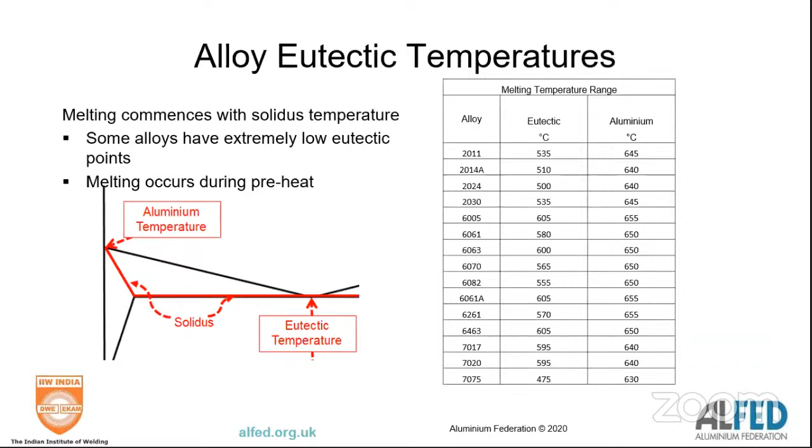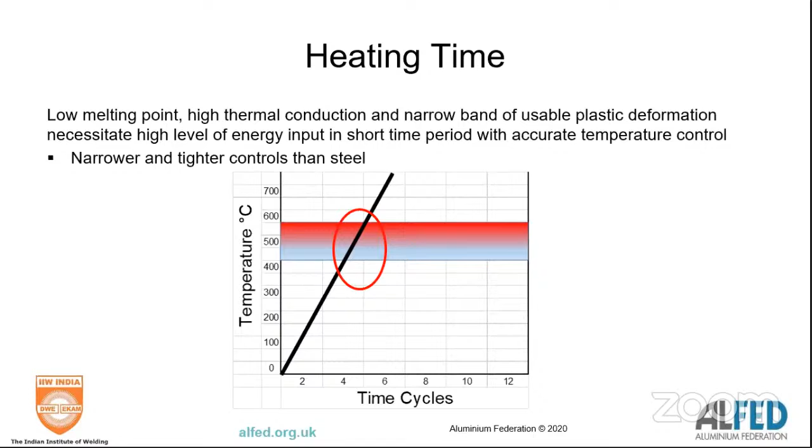When you're spot welding, one of the problems you've got is high thermal conductivity, low melting point, and a very narrow band of usable plastic deformation. This means you've got to have incredible energy control and energy input in a short period of time with accurate temperature control - very tight, narrower controls than steel.

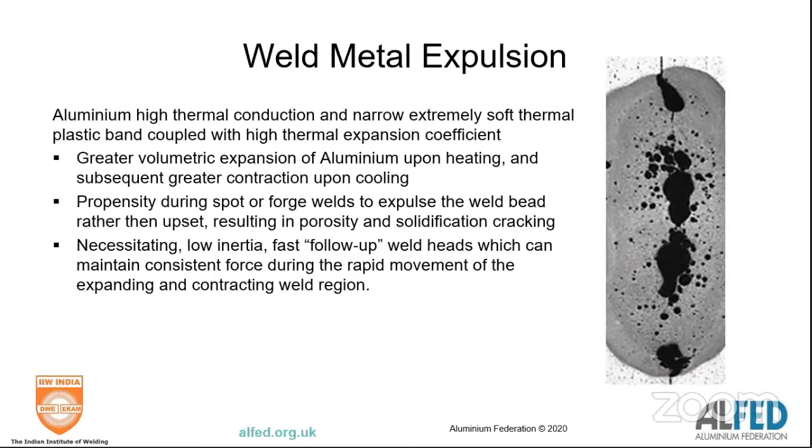Again, we've got high thermal conductivity, a very narrow soft thermal plastic band, and high thermal expansion with big volumetric changes. So there's a propensity in aluminium, a high risk when you're spot welding, that what you're going to do is squirt out your metal rather than upset it.

So with spot welding, you actually need fast heat up and then maintain constant pressure to form your welds. And again, the problem with aluminium is its high specific heat, so when you're cooling it, you've got to hold it for longer to allow it to cool. Your clamping times need to be extended, and when welding some of them, be aware of the contraction in the heat affected zone.

Now, aluminium has got very similar thermal conductivity to copper, and that means up to its melting point, the two have got almost a straight conduction line. Once aluminium melts, the resistivity increases, but that of copper carries on a straight line.

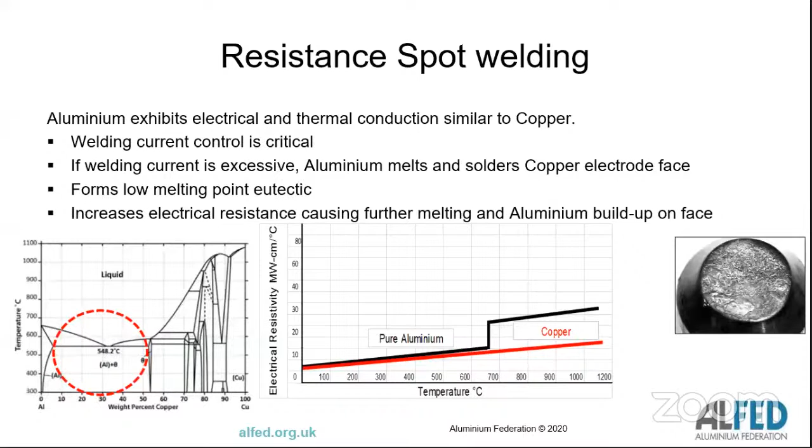So if we're not careful and we're allowing the welding current to run away, what happens is we'll end up with excessive welding currents. The aluminium will melt and it will solder the copper electrode, forming a low melting point copper aluminium alloy on the face of your spot weld. That now means you've lost your heat, the electrical resistance increases, and it'll now melt at a faster rate. So you have a problem with aluminium buildup on the face of copper electrodes.

Typically, if you do nothing, you're going to get about 500 to 700 welds before you've formed an alloy and effectively got a splodgy electrode. So what you can do is regularly buff every 100 or so spot welds, just lightly grind the surface of the aluminium, of the electrode.

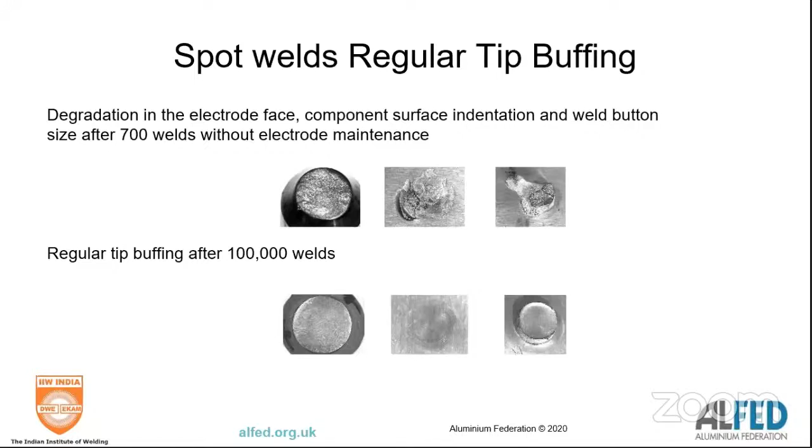There's another technique coming out called delta spot, developed by Fronius, where they use a very, very thin sheet of pure iron and pull it between the copper electrode and the aluminium to stop aluminium copper bonding - so they're welding through steel.

Just looking outside the box for a few minutes, there's a lot of work going on in solid state welding and cold welding, and the Welding Institute is world champion in friction stir welding - invented, champion, developed it.

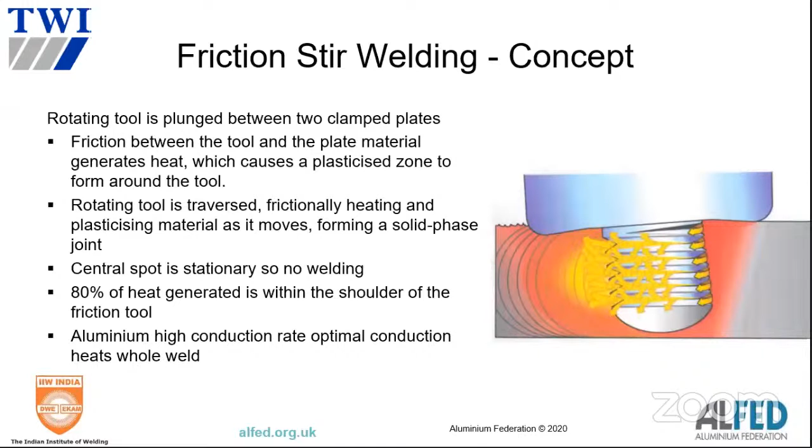In essence, with friction stir welding, a tool is spinning round, plastically moving the metal, giving very localized heat conduction and very localized heat production, which is great because it overcomes the high conduction rate of aluminium. The beauty of aluminium in terms of friction stir welding is at high temperatures, Young's modulus drops off, it becomes more and more plastic, and mechanical strength falls off. So aluminium is actually perfect for friction stir welding.

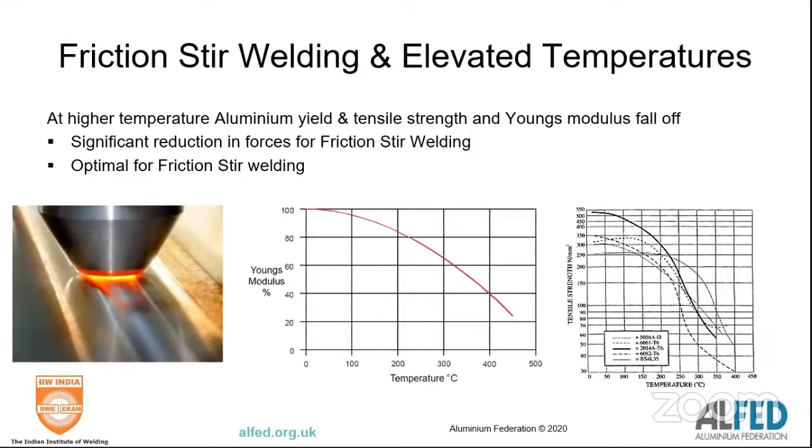We've not mentioned this, but aluminium has a very high work hardening rate. In terms of work hardening, its N coefficient is very, very high, and a high N value means it work hardens extremely easily, very well, and also has high drawability. That becomes important when we talk about explosive welding.

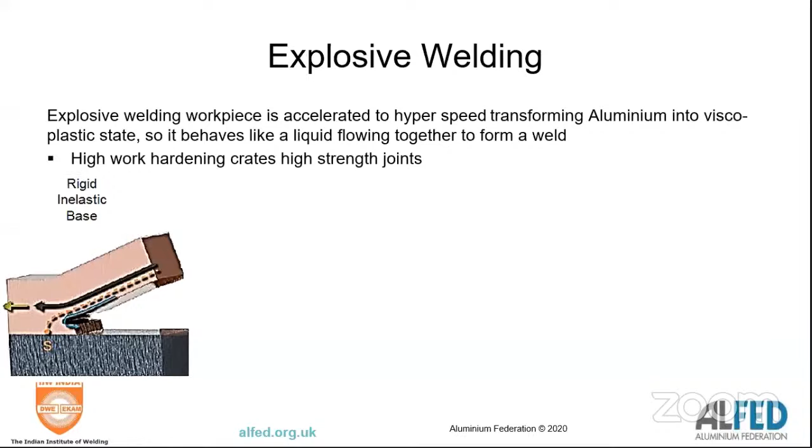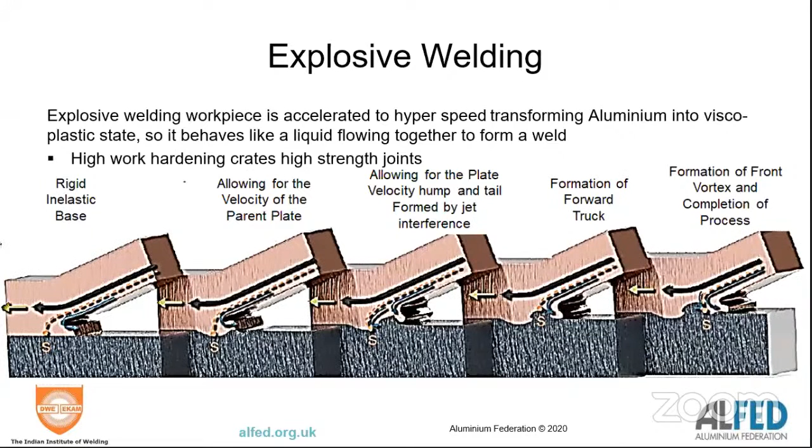So with explosive welding - we mentioned earlier on ultrasonics and micro explosive welding - in explosive welding, what you do is move metals at supersonic speeds and form mechanical joints. The beauty of aluminium is it's got a high work hardening rate and high drawability, so in an explosive weld situation, it'll work harden but it'll also move at good speeds.

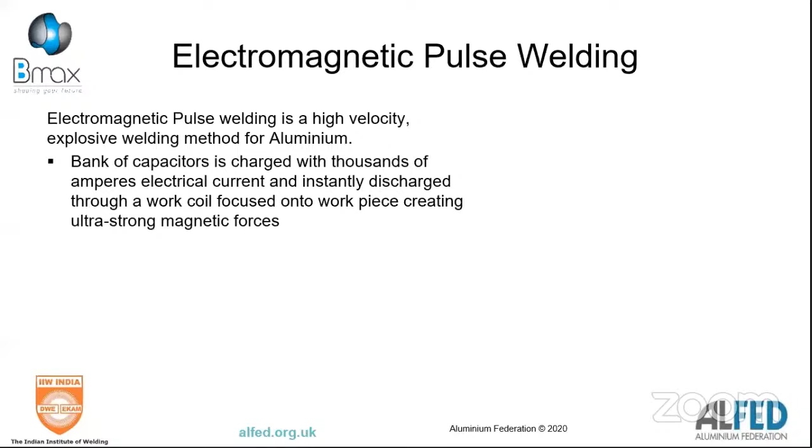Aluminium is non-magnetic, actually paramagnetic, which is important because it means we can use aluminium for electromagnetic pulse welding. In this process, you have a bank of capacitors charged up with very high current levels, then discharged instantaneously through a coil. The discharge through the coil imparts an opposing current in your workpiece, producing very high electric eddy current flows. In essence, with electromagnetic pulse welding, you have an opposing current moving at supersonic speeds. Aluminium becomes visco-plastic and produces an explosive weld. There's lots of work going on researching this at the moment in the UK.